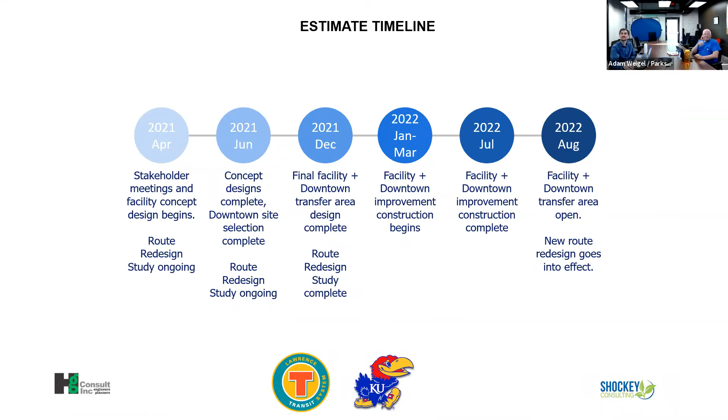I won't go through all the bullets here, but I did want to highlight we've been doing our best to get out in front of this project, trying to get involvement early. I have some info from 2014 and 2018, but we've tried to do a lot of direct outreach, both to neighborhoods and downtown. This last week, some of you on the call spoke with our staff. We were out walking through downtown, handing out paper information and inviting folks to join us on these calls, so we make sure to hear from folks that could be impacted.

We do have some upcoming things to note past tonight, so you're welcome to join. We have our monthly Public Transit Advisory Committee meeting on Monday night, where we'll be talking through some of this as well. We're finalizing details today, so we'll try to get stuff out tomorrow or Friday about some library tabling work we plan to do next week. We'll have the same concepts we show you tonight laid out on the table, and we'll be there to talk through things and answer questions. We hope to do that at a few different time periods on Tuesday the 15th and also Saturday the 19th, so we'll have more details coming out.

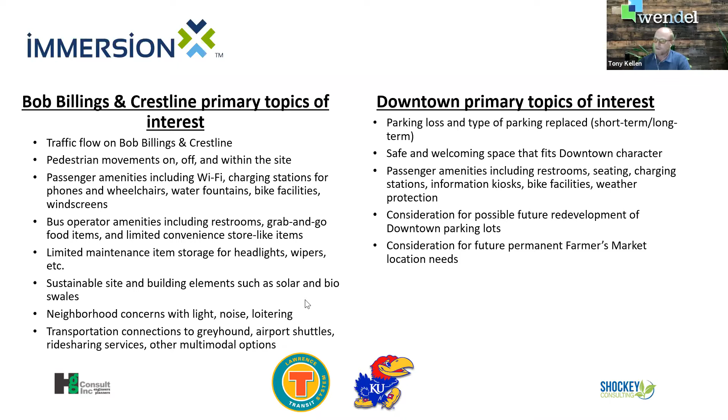So what I'd like to do is move right into the designs because we want to give you folks time to comment. The first design I wanted to show is the Lawrence Multimodal Transfer Center. We have 3 options for downtown, a slight variation on one of the downtown options. But first, let's talk about project design requirements: we're looking at 10 bus slots for the city bus and university bus system, and 2 for intermodal, such as Greyhound and so forth. So we have what's called a Sawtooth Island.

You're going to see that on every single one of our design options. A sawtooth is just a name for the shape that you see, it looks like a sawtooth. The feature that is most desirable for sawtooth operations is that any bus in any location can come into their spot irrespective of the other routes. It's not a first in, first out situation. It gives you the maximum flexibility for a route that's coming in late to just pull right around, pull in, board their passengers, deboard. So you're going to see that sawtooth configuration on everything.

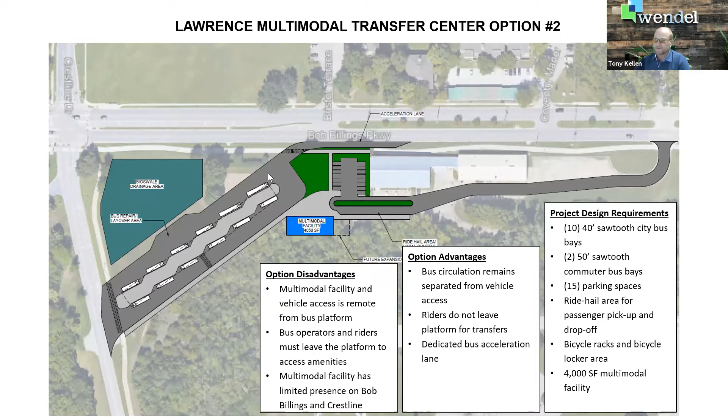So those are your three primary options: parking between the bioswale and buildings, parking to the right with the island closer, and the third option where the building is on the island. And again, a fourth option, a variety of this, is in development.

From there, we'll go to downtown. The first option for downtown is Vermont between 8th and 9th. Here what we do is remove the diagonal parking from the parking lot and the on-street parallel parking.

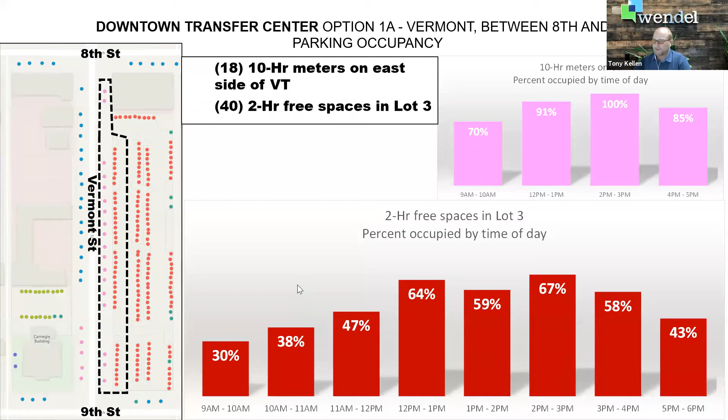So plenty of room. We have another option that we showed as a variation. But before we talk about that, I'd like Adam to be able to talk about parking and how those impacts are on the street here.

So for the downtown options, we know that parking is an issue we need to look at closely. With some of the new technology that our parking division has, with LPR vehicles and different things, we're able to see occupancy in different areas at different times of day. The different charts you'll see throughout here are about 10 days worth of data in May of this year. We're going to keep collecting that over the next month leading up to the city commission meeting so we can make sure we're seeing semi-regular patterns, at least for this time.

Just to orient you, on the left side of the screen, you see the parking spaces within that black dotted line that would be impacted by this particular option. There are ones shaded a pink color, and those are long-term 10-hour meters. Then there's those shaded a red color within the parking lot that are the 2-hour free spaces that exist in lot 3.

During the time period this information was collected, one of the things that really stands out to us as staff is you see at a variety of times a day, those pink spaces, or the 10-hour long-term meters, are very full. Those are very well utilized, and that's something that if we were to proceed with this option, we definitely need to figure out how those get replaced. Are there 2-hour spaces that would be converted to 10-hour long-term? There are different options we could look at, but it would not be viable for us to just remove those without figuring out how to replace long-term parking in this area. We see that as a need.

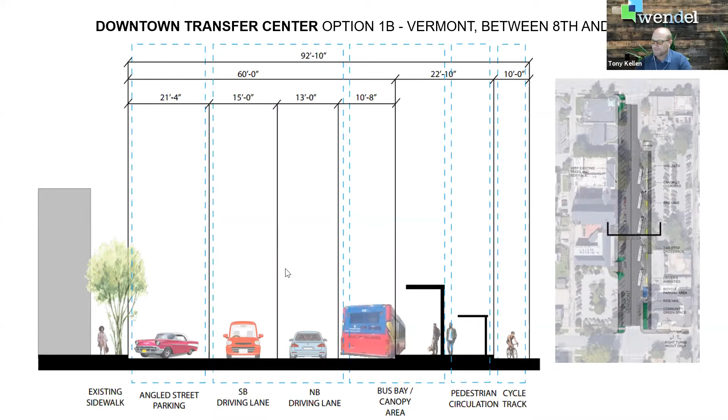Looking at that from a street view perspective, you can see where we now have the angled parking. That takes up about an additional 5 feet. We have the southbound lane, northbound driving lane - actually it takes up a little more than 5 feet, but we still comfortably have a 15 and 13-foot lane. The bus lane stays the same. Where we lose 5 feet is in the platform, so we'd like to stay as wide as we could since it functions as a city sidewalk as well. But this still works from a design standpoint, and we have the cycle track. So not a lot of change, but we have that shrinking here, and the center turn lane is gone.

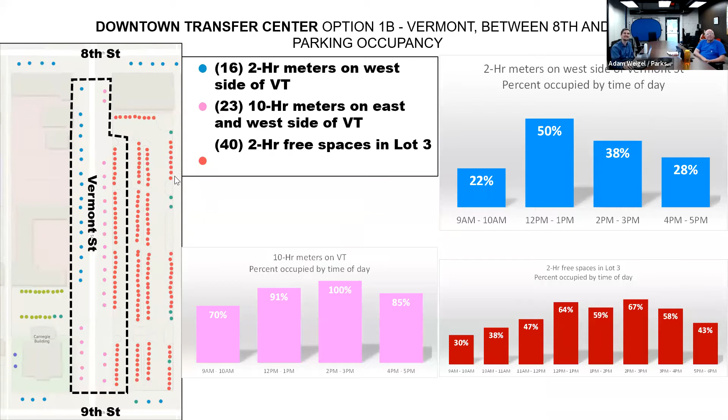I do see Lynda. I'm hoping, Lynda, we're hoping just to really briefly run through the last 2 options here, and then we'll go back to any slide you want us to go back to. Is that okay? Okay, yes. Thanks, Lynda, I see a nod. Yeah, we're not trying to limit discussion, we're just trying to get at a high level here, and then people can go back to any slide they would like.

So the second option is between 10th and 11th on Vermont. To meet the design requirements for 5 spaces, there's really not an option but to take the entire lot. Whereas option 1 is a very efficient and good use of space, this requires taking the whole lot. We have 6 metered spaces lost, 49 parking lot spaces lost. And when you see the word '15 existing tree loss,' we'll preserve what trees we can and put back trees in the design as well, so it's not that we're completely making it hardscape and eliminating all the trees. We have a little bit more area for green space.

We do have a dedicated loading area, so people are not traveling quite as far down the platform - they can circulate right in the center here. And the driver amenity building is not as far away. You see the word 'ride hail' here, but really that is parallel parking for area businesses and access to the alley.

Disadvantages - again, impact to the long-term parking. And then we have joint bus and car traffic coming in and out of here, which is generally never very desirable from a safety standpoint. We like to see that separated. So that's Vermont between 10th and 11th. Then we go to the parking configuration on that.

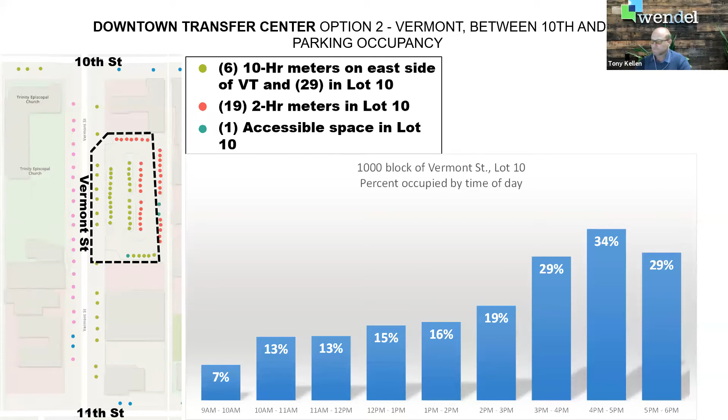I'll just mention with this lot, obviously a lot more spaces impacted. Again, this is 10 days worth of data in May of this year, but you can see pretty low occupancies through the morning and early afternoon. They go up somewhat towards the end of the day. But like I said, we'll keep collecting data and see if we can gain a better overall picture.

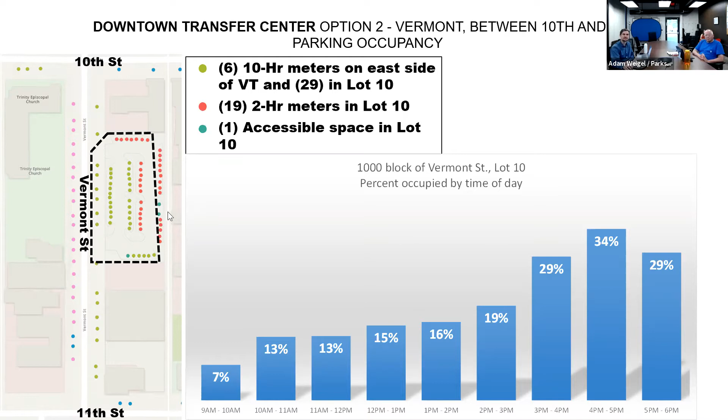The third option is over on New Hampshire, across and near the farmer's market location. In this configuration, again, we're taking the entire lot. We're putting some parking back in here for the business back of house. The alley is maintained. We do have, as a disadvantage, a large amount of grading work to make this transition and make this space work. The driver amenity stays on the island, similar configuration to between 8th and 9th on Vermont.

Whenever you can move the station activity completely from a street, it's advantageous to the operations, but again, option one still works quite well. Businesses get this newer designated loading and parking area. Proximity and connection to Massachusetts is good - I think there's a natural crossing through here, if I remember. But the project impacts are significant, with 4 meter spaces lost and 86 parking lot spaces lost.

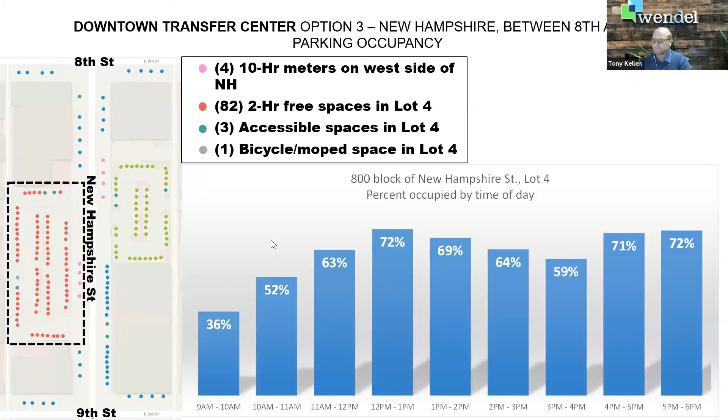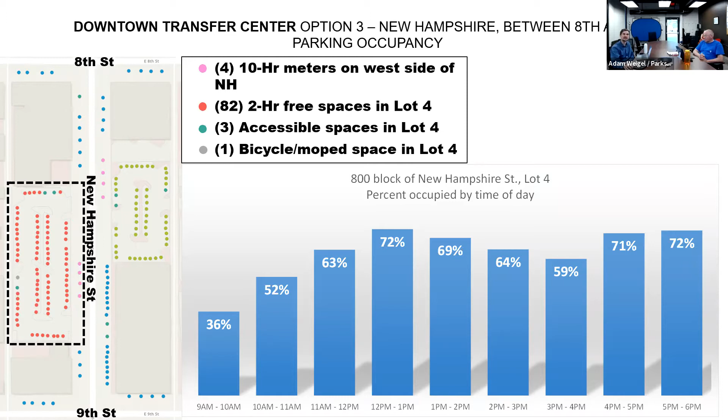Be brief, but yeah, like Tony mentioned, a lot of spaces are impacted, and the occupancies here are definitely higher than some of the other ones we've seen.

And then we can talk about the next steps. Yeah, I'll just speak briefly on this, and then we'll be able to open it up for folks. We can go back to any slide you want.

I just want to mention the darker colored tiles where we're at right now with the public meetings today. We do have a presentation with similar content at our Public Transit Advisory Committee meeting on Monday, so you're welcome to join us there and listen in.

We will be coming back to the Multimodal Transportation Commission and the Public Transit Advisory Committee in July, after we've received a lot of comments throughout this month and other engagement we'll be doing. We'll be consolidating all that for any revisions we need to make to the concepts you see tonight, ultimately getting direction from City Commission on the 13th as to what concepts for each location we should move forward with.

One thing I mentioned on a prior slide that doesn't show up here, because we were still finalizing details, is that next week we're looking at some tabling, in-person opportunities at the library on the 15th, which is a Tuesday, and also that Saturday, the 19th. We hope to be available in person in the front lobby area of the library with the same concepts you see tonight, able to answer questions in person or write down comments on the maps themselves.

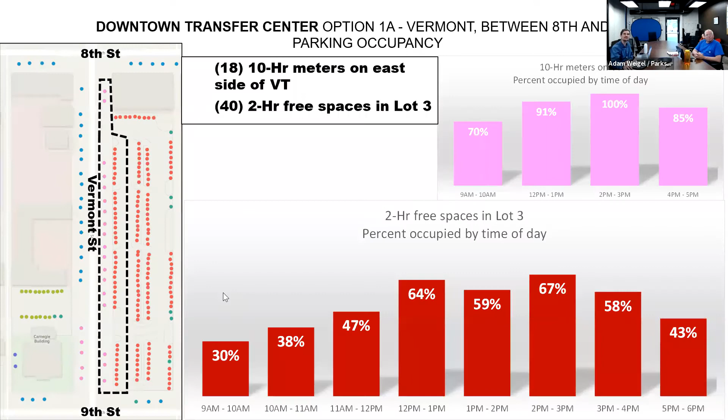So I'll leave it at that, and at this time we'll be pretty informal about this. We'll try to give everybody a chance to chime in, but perhaps, since I saw Lynda raise her hand, would you like to start, and we can go back wherever you'd like us to?

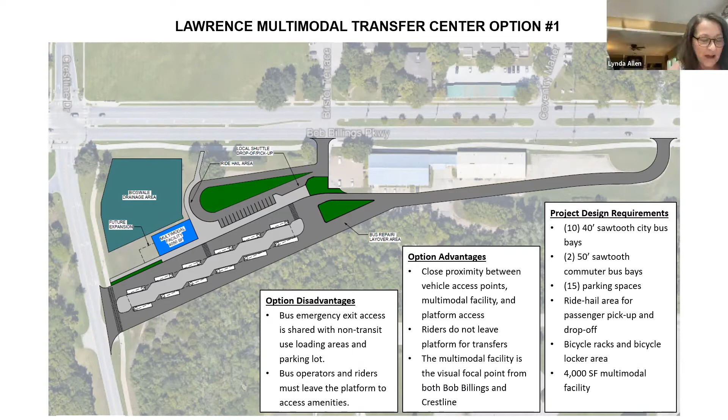Yes, go. Can you hear me? Yes, we can. Okay, first of all, I'd like to talk about the 800 New Hampshire site, the very last option for downtown that you presented.

Just so you are aware, my sister and I are sitting here. We're the property managers for 2 of the buildings that would be impacted by this option, but I'm looking at the parallel parking space in the alley.

And we have private parking off the alley, and I cannot figure out how one would get a car out of there if somebody was parallel parked. I just wanted to point that out to the architect.

We can barely make the curve as it is. So if you take half the alley, I think we'd lose 5 private parking places right next to the breezeway on the other side of Jock's Nitch. The address is 824 Mass.

Okay, I don't know. There's also light poles in the alley - actually power poles - and I'm not sure how you would parallel park around those as well. Has that been considered? Did anybody try to see if there was anything working?

You've got Pickleman's too, that tries to get in and out constantly all day long from their private parking. So I'm just pointing out that this really doesn't work. This parallel parking does not work for Jock's Nitch.

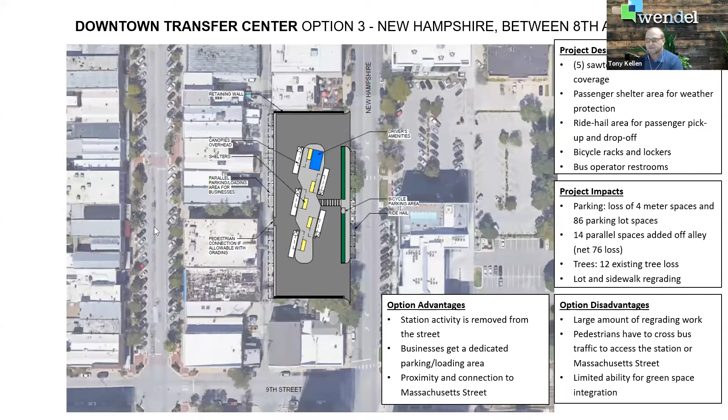There's been a lot of study done, and we're the last design firm to the game here. But when we look at this site, option 1 downtown actually probably has the least amount of impact. There's a parking garage nearby that's only a half a block away. We think it can be a good amenity and enhancement to your downtown, an enhancement to your bus system, and a good connection to the university. I believe there's 2 or 3 routes that connect from the university. So there are always trade-offs, but more and more we're seeing the younger generation leave their cars behind and look for public transportation options.

You're right, this is a thriving area. The whole downtown, I was very impressed.

Do you have data? Do you have data to support that people would be taking the bus from campus to downtown to spend money downtown? I don't see that, seems like a real stretch to me. I'd like to know what your data is that indicates bus riders are going to come downtown and spend money at downtown businesses. I don't know why they wouldn't Uber. Why would they not Uber downtown? I just don't know. Tell me about a population that is using the bus to get downtown to spend money downtown, please.

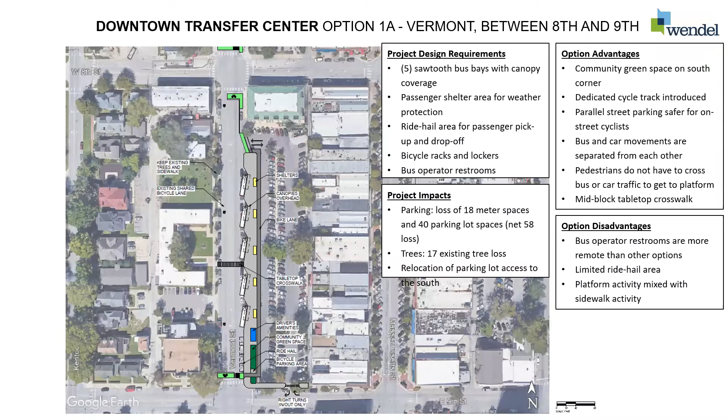Hi, I'm Deanna. I'm probably a big reason the buses are considering moving. We are Climb Lawrence, right across the street from the library. I actually appreciate the conversation on moving the transfer station from where it currently is. I strongly agree with what everybody has been saying in that we don't need 5 bus stations downtown. What would be more ideal is having a couple covered bus stops that bring people to key locations and don't idle in the area. It would actually encourage more walking in and around the city, especially with more peripheral bus stops.

I can tell you from firsthand experience the amount of loitering we already have in front of our business, and the way it impacts driving in and out of our parking lot. We're looking at building an addition. Having the buses directly downtown, 5 of them in a row, no matter where you put them, it's going to cause heartache for the businesses in this town. So I think really trying to separate out where those bus stops are is going to be a more functional option for the city, and it's going to ultimately make the citizens and the community a lot happier. That's all I have to say.

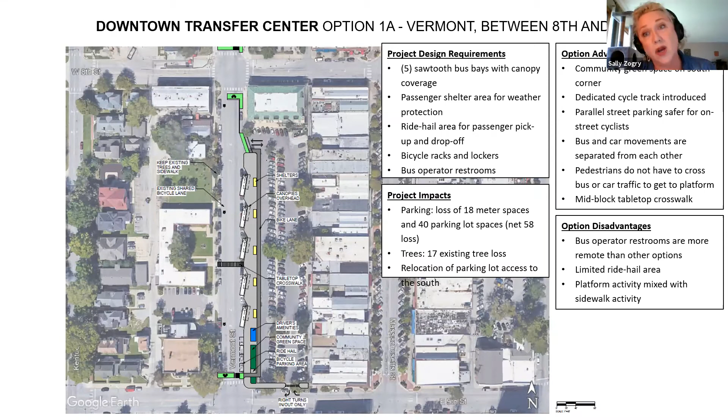I am just saying that this is how we see it, there is a lot to pay attention to. And so I really hope that people will pay attention. Obviously I'm glad that all of you are calling each other, talking, using your relationships, and are very involved, because this is an issue that will affect all of us.

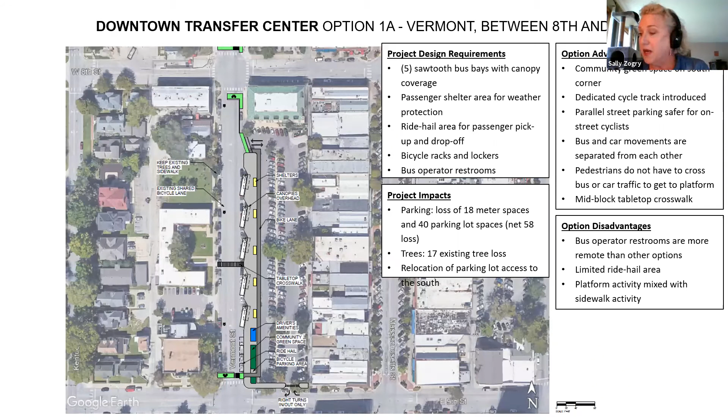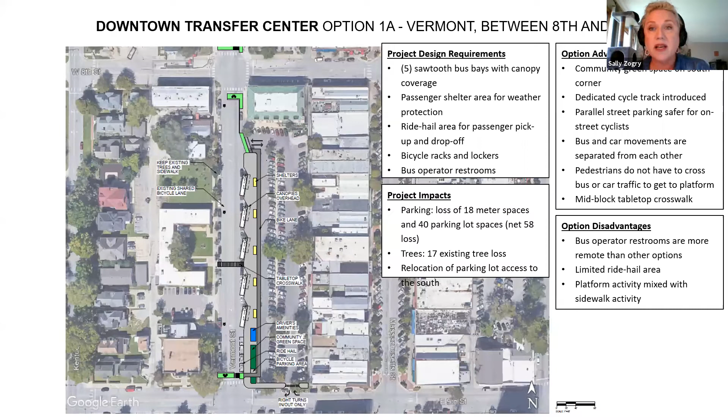I have a couple of others - Adam made it clear that the city does not want to purchase property. It doesn't make sense for the city to buy property to put this type of facility. Maybe at some point there could be a bullet point presentation or some kind of short explanation that you can give. Adam, I'm of course always happy to distribute any information and help disseminate why there is a five-route transfer hub necessary for downtown.

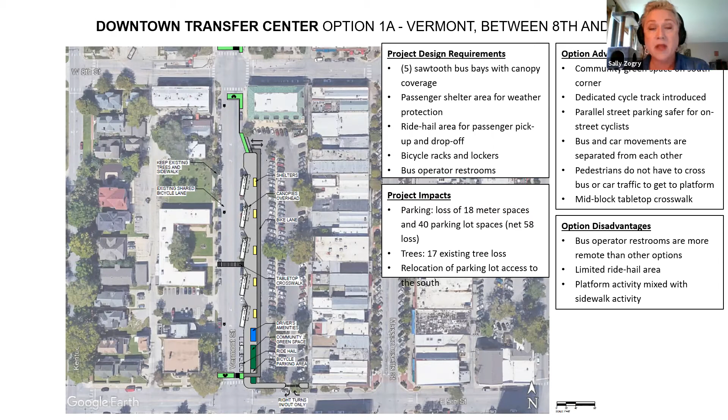What that does is eliminate the need for people going cross town, who need to use the bus to get to work, kids to and from school, people getting to doctor's appointments, etc., from a 2-hour bus ride. I lived in Albuquerque, New Mexico in the late 80s, and let me tell you, it was a 1.5-hour ride to campus, and if I missed my bus, it was an hour until the next one came. So I can appreciate, even though we're a small city, that you're trying to make the routes efficient and meet the needs of the bus riders.

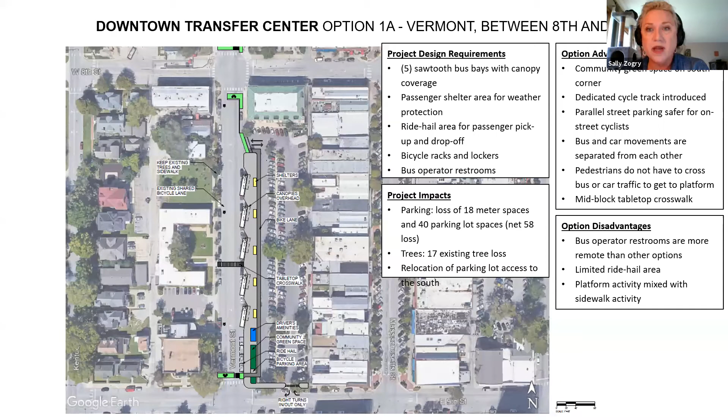Also lot 17, which is right across from City Hall on 6th Street.

I'm not trying to tell you - I sit through so many of these meetings, and I know that's the reason we have consultants, and I'm not a transportation consultant, so I'm not trying to second guess you. Just again, when I made the suggestion about the angle parking, we had a great conversation about it. So if there are...

Several underutilized city lots, and I don't know if those can be considered. I do also want to make sure that we talk about parking.

We're all aware of parking and the perception that there is not enough parking or there's not enough convenient parking downtown, which is a perception. It is not a reality.

We all need to do a better job of promoting what the parking options are, and we are talking about that, and we have a great opportunity with our new parking technology that we are still implementing. It's being implemented in stages, so things are being added, but we do need to seriously consider the equity issues.

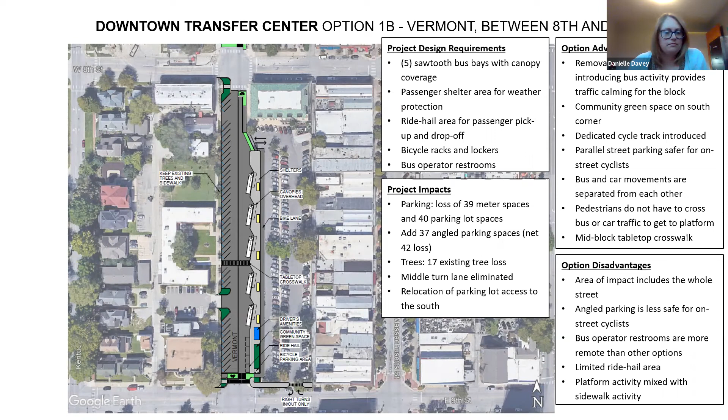Can I have a chance to talk, please? I can't find my button to raise a hand. And I'm the only person who came here today who doesn't represent a business, and I really would like a chance to speak to some of these things. Other people have been able to. Mr. Hawley spoke forever, several times.

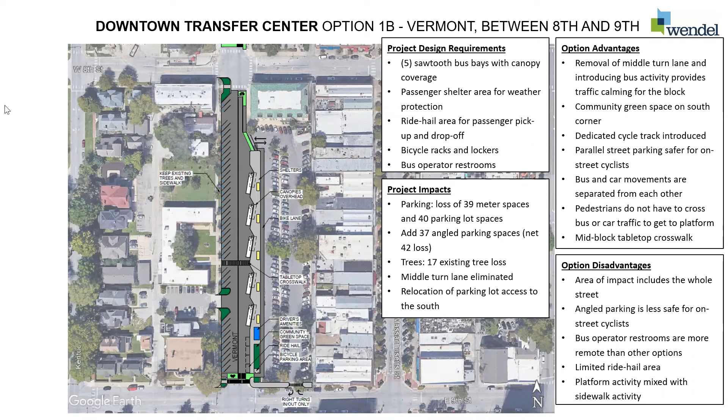So don't tell us to go some unsafe, far away place. I could not walk from over at the Riverfront Mall or any of those places. Stick us up on 6th Street, you know? So yes, there's problems over by the Lawrence Public Library.

If that lady is still here who has the climbing wall, well, I could tell you what that property was like before, and while they were revising it, nobody ever swept up the broken glass.

It was just a horrible mess. There were weeds everywhere, no one took care of it. And then they decided to come in, and as soon as they did, it was very clear people asked questions about how their customers would get there, where they'd park. And during the construction of it, you couldn't walk down the sidewalk to get to a bus without going way out of your way into a dangerous situation.

And I'm old, I don't need to be tripping on stuff. I care about myself, even if you do not care about me and other people who want to use the bus. The idea here is simple.

Any good quality city has as a major part of their infrastructure public transportation. And if we want to talk about Lawrence being an inky dinky, rinky dinky town, while all these other grand things are going on, you're talking about building parking garages on lots and so forth. You can't have it both ways. It can't be a little rinky dink town, and it can't be a good city that's looking at forward-thinking planning.